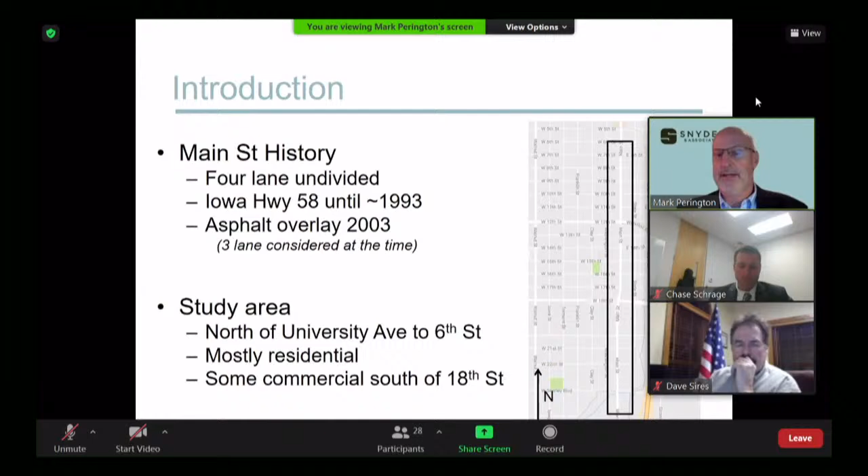This study, as we said, this presentation is an update to the study we did. We really worked on that back in 2016, in the summer and fall of '16 and the spring of '17, and then we brought it before council with a couple presentations in the summertime of '17, for those who don't recall. Essentially the area was a little bit south of Seerley, North University, south of Seerley, somewhere in there, on up all the way north to 6th Street, tying it in with what is really just finishing up here soon with the downtown streetscape updates. So that was most of our study area.

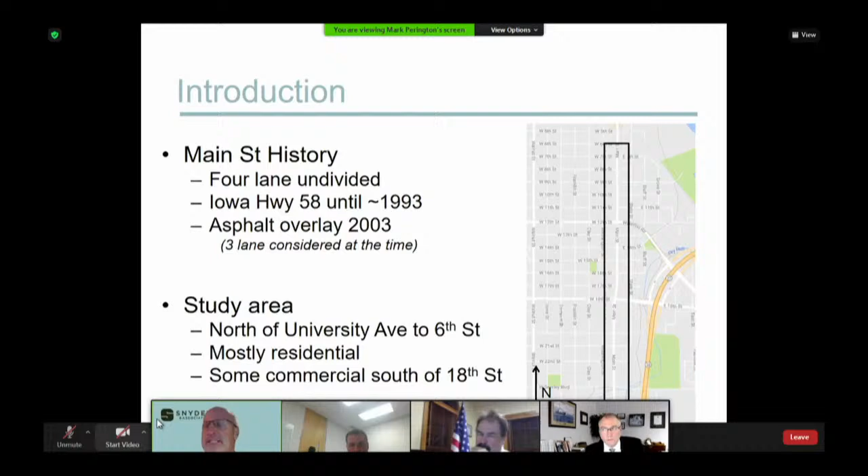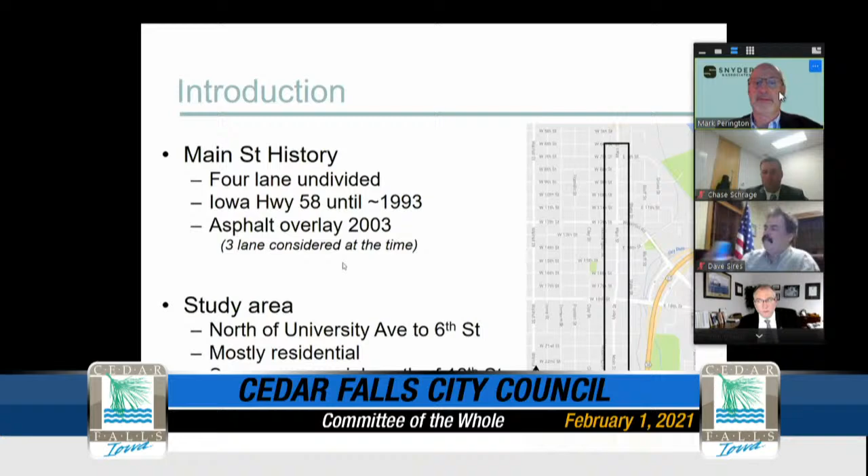The history of the corridor: it's been a 4-lane undivided road for quite some time now, and really up until 1993 it was Iowa DOT controlled when it was Highway 58. As for the last major maintenance work, there's been some patching done, but really an overlay was done in 2003. Back in that time, there were some discussions about, okay, when the major overlay work was going on, maybe are there some different ways to address the corridor with some safety and operational concerns.

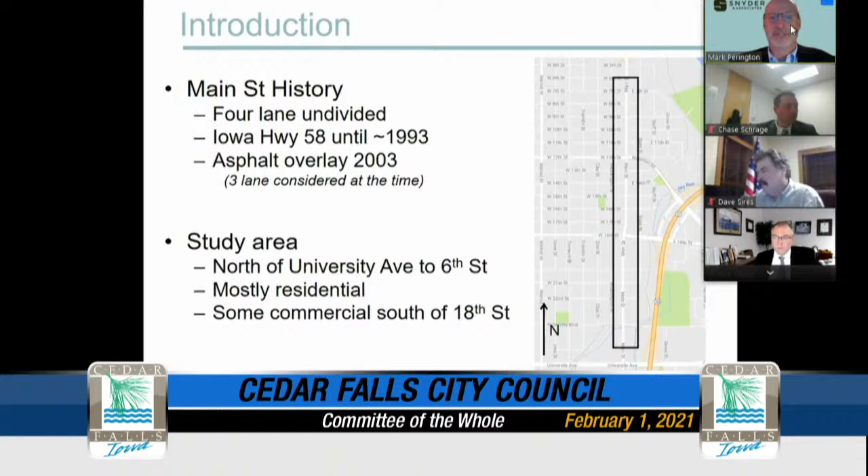So the primary reasons behind this study: we knew going into it that the corridor is in disrepair with the pavement - the asphalt's old, aging, and the problem is really the sub base, what's underneath it. It's just so old. You can keep putting a new top on it, but it deteriorates very quickly as we go through the freeze-thaw cycles of the winter. So it's getting to that point of diminishing return - you just can't keep putting little patches over it and get much life out of them.

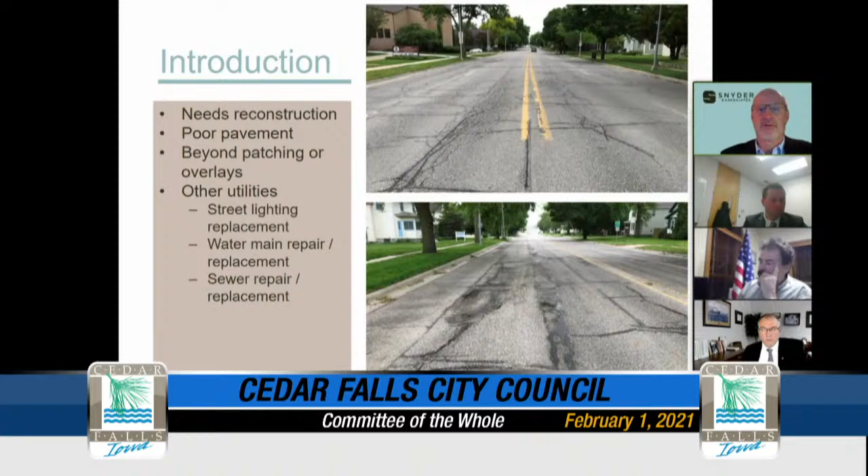Some other things going on in the corridor: the street lights need replacement. Again, they've been there for a long time. Some of the bases are getting rust and there are concerns with corrosion there. And there are some other issues with utilities underneath the corridor - the water main, I know at times there's some repairs needed there. Again, it's getting old, along with the various types of sewer, both storm sewer and sanitary sewer.

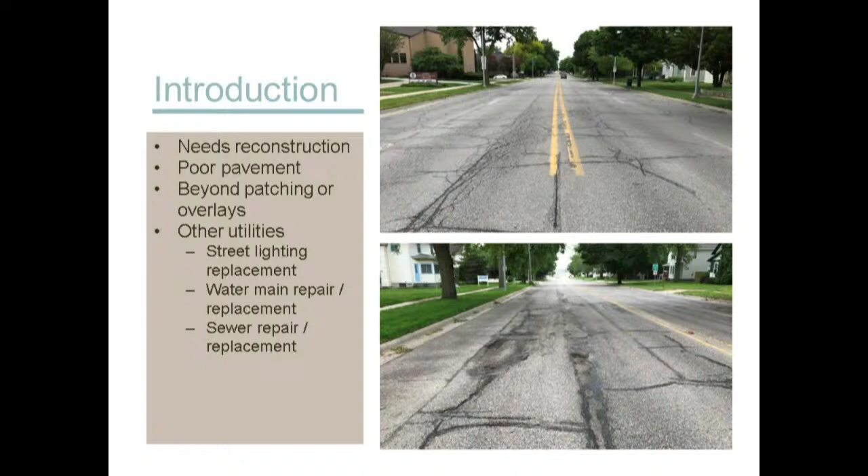So when we worked on the 2017 traffic study, because this total reconstruction was being discussed at the time, we felt, well, this is an opportunity. If you're going to go in there and remove all the pavement, the curbs, and old sidewalk, this is the perfect time to ask ourselves what do we want to do with the corridor, and how do we want it to behave for the next 25, 30, even 40 years. So there was an opportunity there to look at safety and operations and consider these types of alternatives.

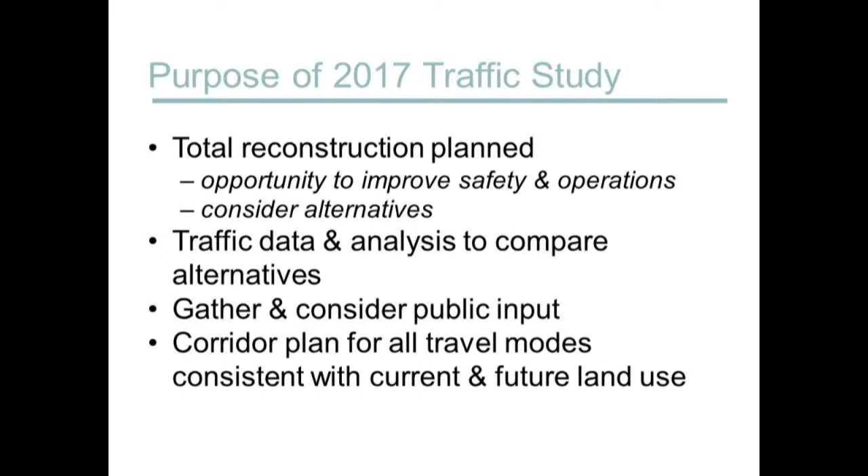We did the typical traffic study approach. We gathered fresh count information, safety information, all of these types of things. We had a couple of public input meetings, so we were able to share a lot of ideas with the neighbors in the area, the business owners, as well as the residential neighborhood. And it was nice - we got a lot of interaction and input from those folks.

And then we really just wanted to come up with a corridor plan. Our charge at the time we worked on this, and it's still the case, was that we wanted to consider all travel modes in the corridor and really try to look at the current land use as well as future land use.

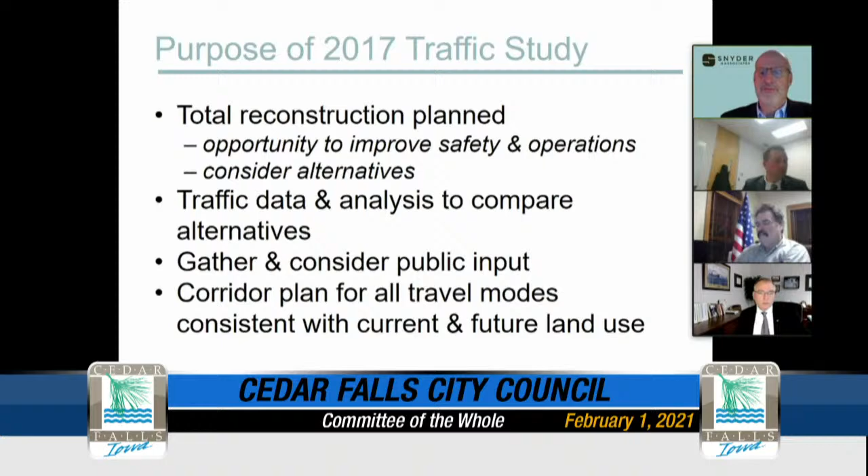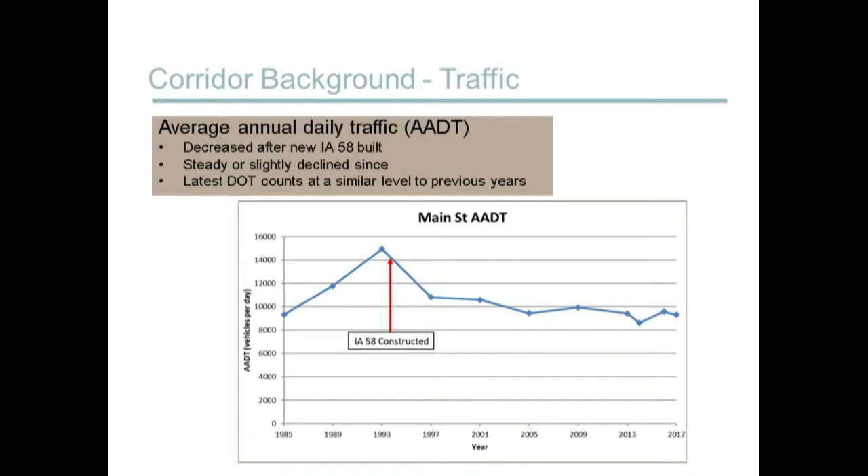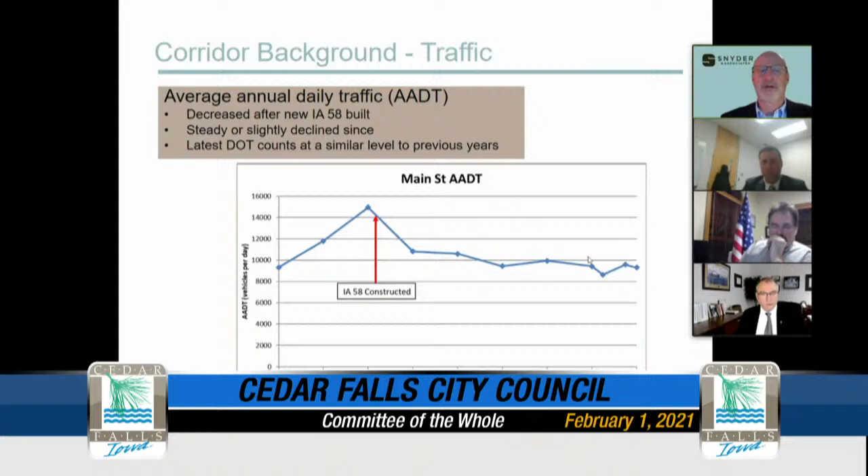That traffic diverted. And then really what we've seen is kind of a steady, these are just count increments. The DOT helps do traffic counts for all the communities. And so you have these count increments of about every 4 years, but we've seen really just a steady traffic in there, right around that 10,000 line or a little under. It varies a little bit in the corridor from one end to the other. It gets a 1,000 or so more, but generally speaking, we're in this 10,000 range as we look at the corridor. So we've really been on that plateau for well over 20 years now.

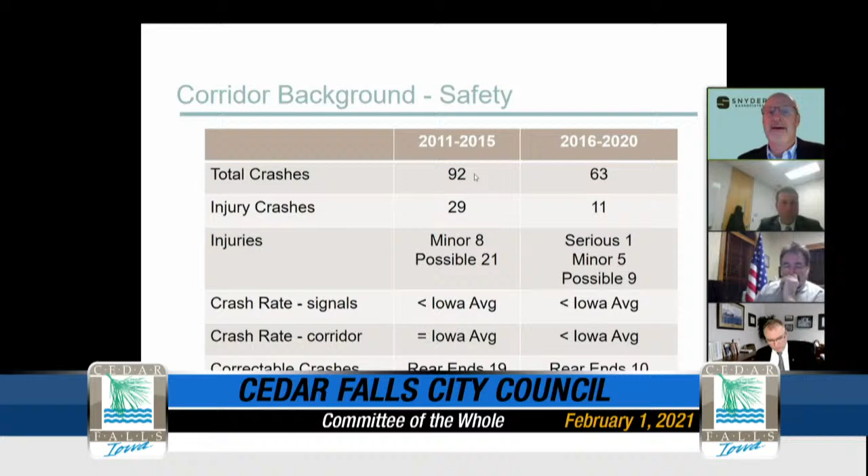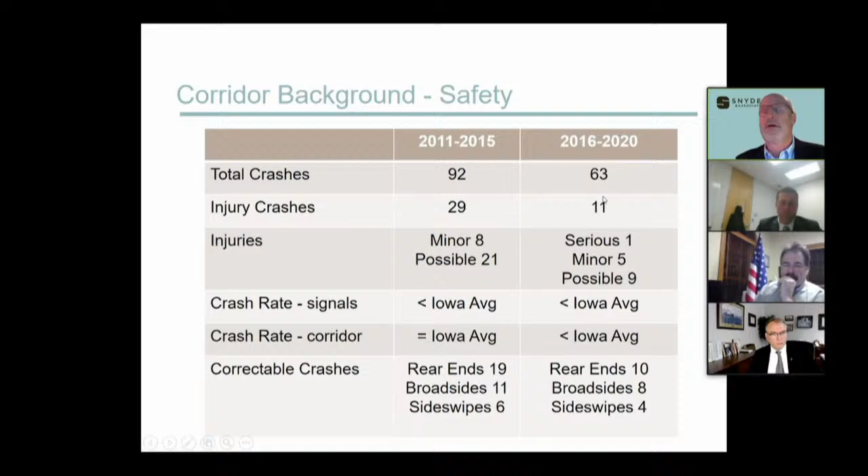Other key aspect of it is talking about safety in the corridor. Back when we did the study, you see this first column here, the data we looked at the time was a 5-year period, 2011 to 2015. You can see total crashes, what crashes do we have with injuries associated with them, and you can see comparables. We had the opportunity here with giving this a new look. A good thing to see is that crashes have gone down over the last 5 years as a whole. I don't have the year by year for you here, but that's a good thing. Still getting injuries in there, with the corridor one to the other.

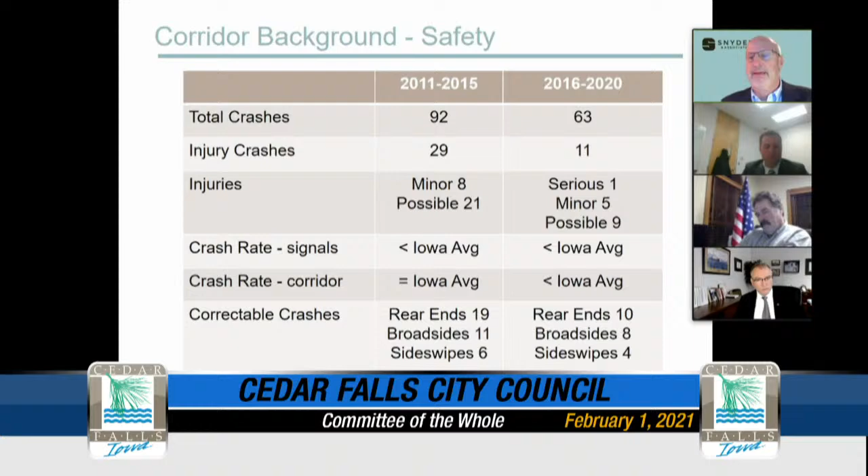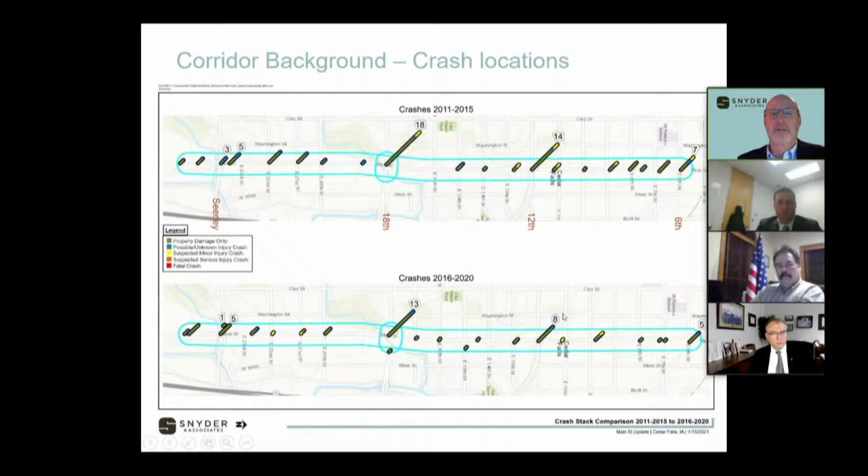That's Main Street. And one of the things that group identified was a desire and a recommendation to try on-street bike lanes, if the timing would work right for that possibility in the corridor, if it makes sense with a cross section to do that. So that was another key input into what we were doing at the time when we worked on this.

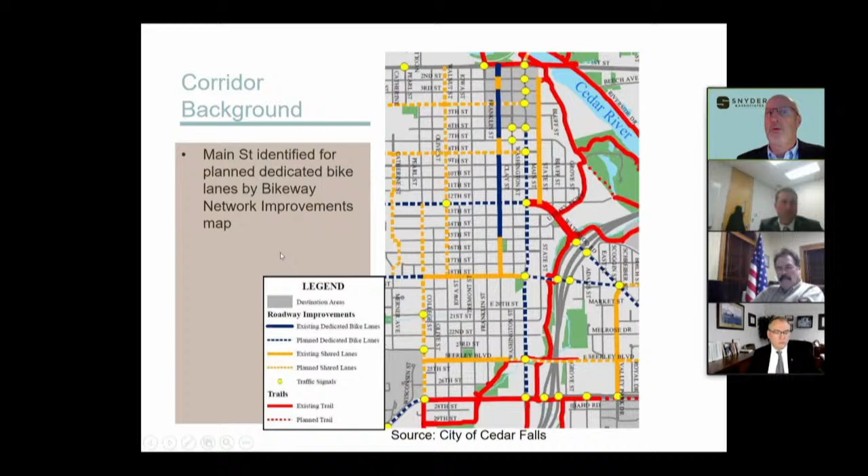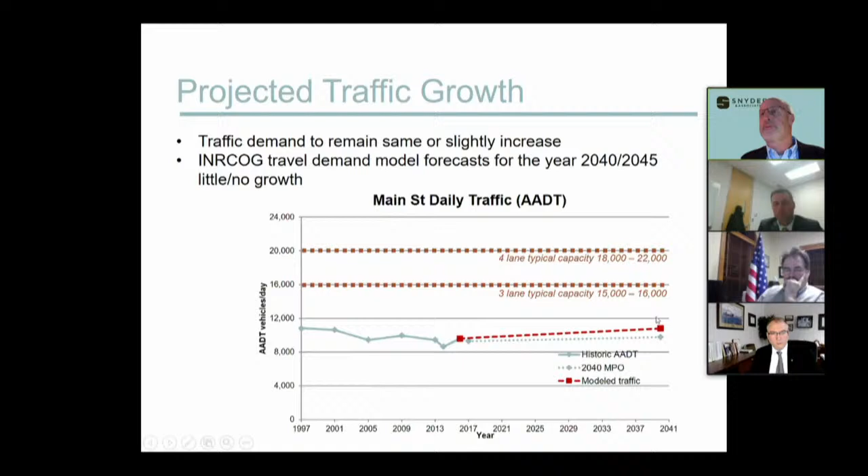So then what we did with the corridor is we talked about alternatives that we presented to the public and what kind of seemed like the obvious choices in the corridor, given, again, the existing land use, not a lot of change going on with those land uses. And really, we had three basic alternatives. There was kind of the 4-lane throughout, really no different than it is today. A second alternative was, what if we develop a 3-lane through the corridor, which again, one through lane in each direction with a center turn lane.

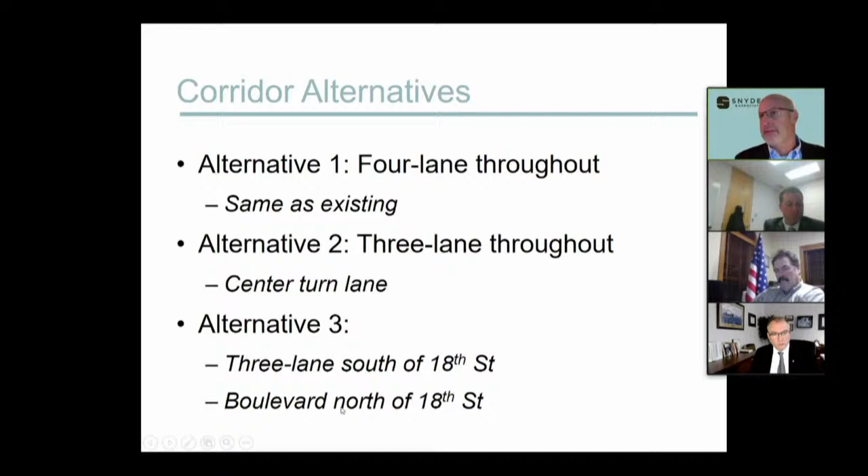And then a third alternative that came out of some discussion, and given the nature of the land use with the residential area, really the heaviest residential between 18th and 6th, was what if we had a 3-lane south of 18th where we have a little more commercial activity, but perhaps north of 18th, what if you had a boulevard in the middle, if we don't really need the travel lane? So graphically, now to help remind you, what does that look like?

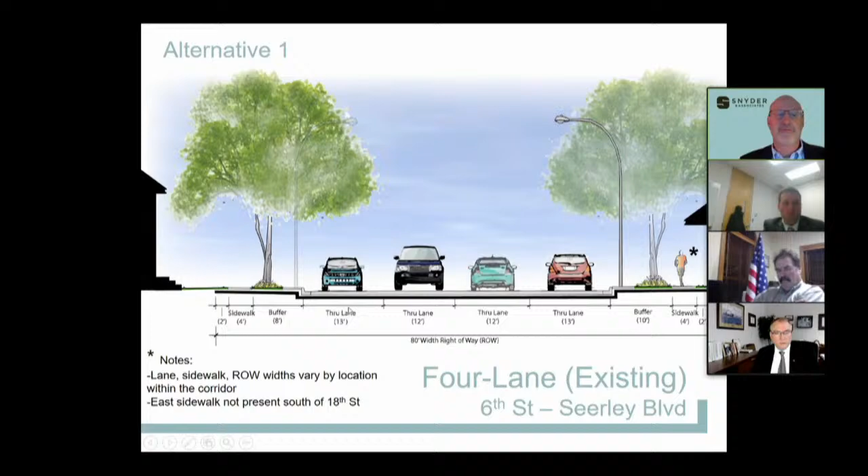There's essentially the 4-lane through the corridor, the 2 through lanes in each direction. And it isn't exactly the same all the way through, but generally speaking, there's about 80 feet of right-of-way through the corridor. It gets a little narrower, I believe it's at the south end. It actually gets a little narrower in a few places. But you have these through lanes, and then you have that little bit of buffer, and then you tend to have a 4-foot sidewalk on both sides of the corridor. So we just tried to represent that with an alternative to just put back the same thing.

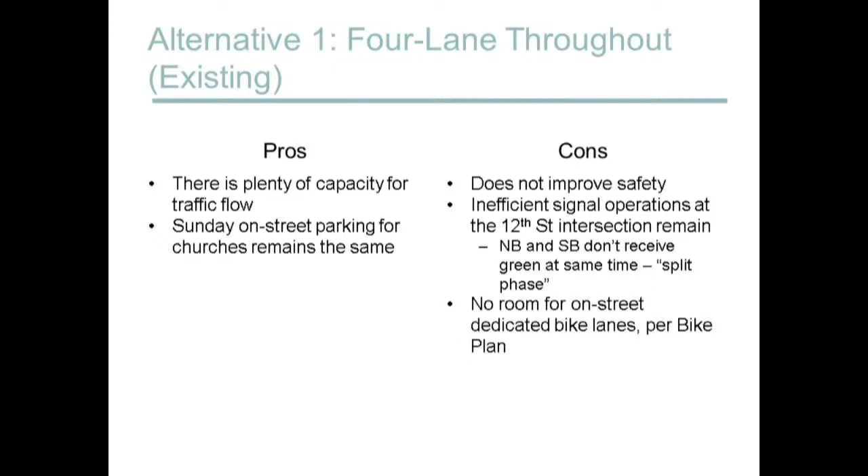Pros and cons for that. There's plenty of capacity for the traffic flow demand we have, in that chart I just showed you, that's more than ample. There is a small element, as we looked at in the corridor, up in that north end of the corridor, there's some on-street parking for churches that tends to occur on Sunday or other religious holidays. That demand is pretty small because there's just not a lot of parking stalls where you can put cars parallel parked on the street. Any given block, there was maybe 5 or 6 stalls, as I recall.

Some cons to that alternative, it doesn't really help our safety. That same 4-lane cross section has certain safety operational problems. And then there's been some concerns with signal operations and inefficiencies with the split phase signal at 12th. And then if you're wanting to look at the on-street dedicated bike lanes per the plan, you can't really incorporate that in.

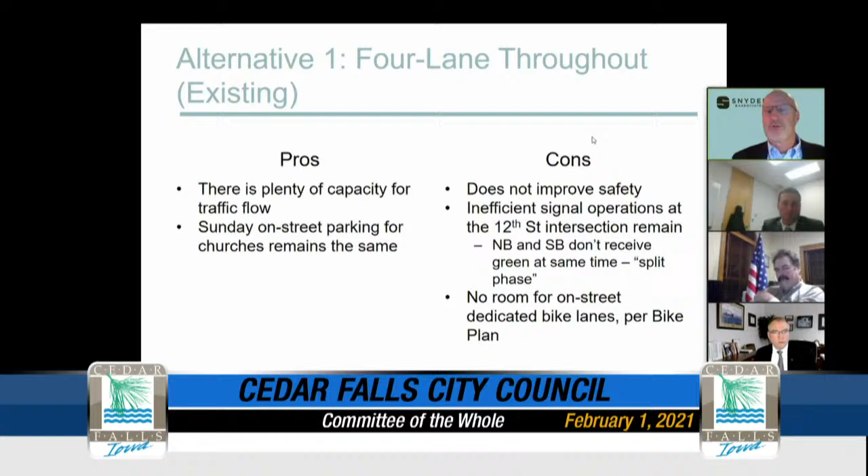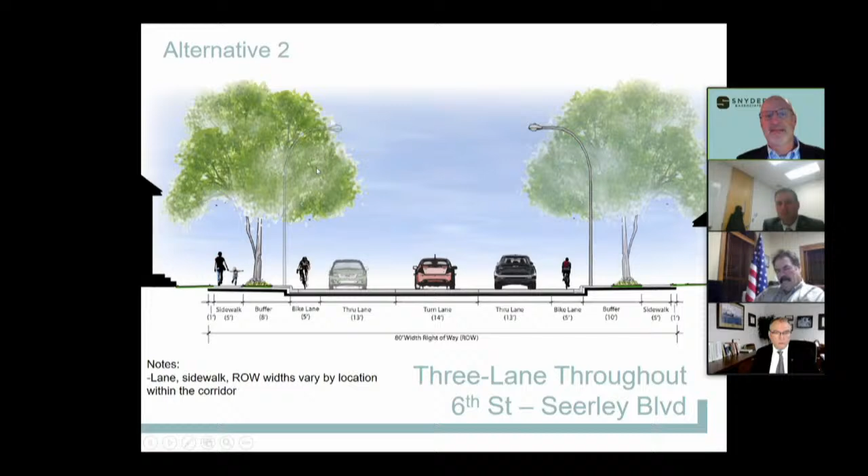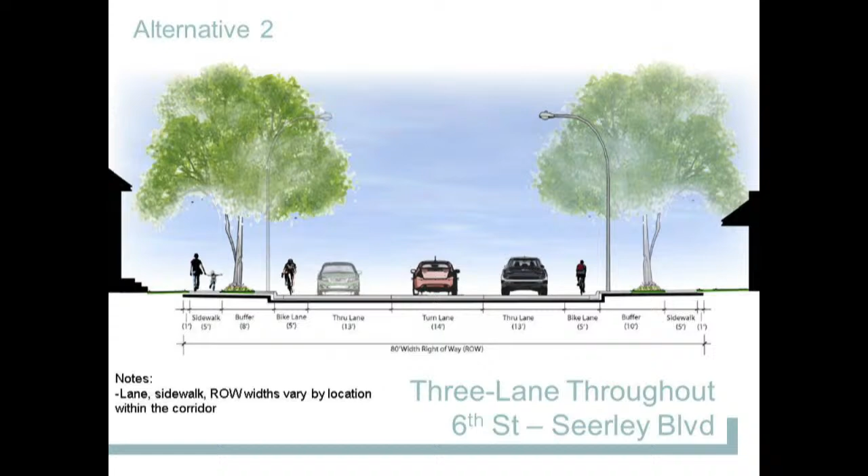And there's a lot of details to still look at with a design, but there's potential in here to even narrow this down a little bit more, a few feet. So there's some potential that that could tighten up a little more, which would save on some cost with construction having to be placed or concrete.

Pros with that, there's a lot more pros we get with the 3-lane. It's proven fact for a lot of years now. We get a lot more safety with that. We get rid of a lot of crashes that we have with the 4-lane. We get a much better speed consistency through the corridor. That was something that we did get some feedback from neighbors, that with that 4-lane, and because we're not very busy out there, people have the ability to pass people, go around and accelerate, and so you get a lot of speed variation.

We have more than ample capacity. Again, if you remember, I told you about 15 to 16,000 a day, and our demand now is in that 10,000 range. And even if we grow, we think it's only going to be maybe in the 12,000 range. So again, ample capacity to handle the traffic. We separate that left turning traffic and through traffic, which is a good thing. That's our safety benefit. We can make the 12th Street signal operate in a little better fashion.

And the other thing is, for any pedestrian crossings in there, we can actually help that pedestrian crossing. For pedestrians, it's easier to navigate when you're only dealing with the 2 through lanes. The center turn lane isn't per se a place for pedestrians to stand, but it does give them kind of a separated area out there as needed. And there's some enhanced treatments we could do. So that helps out, and it presents that opportunity for the bike lanes.

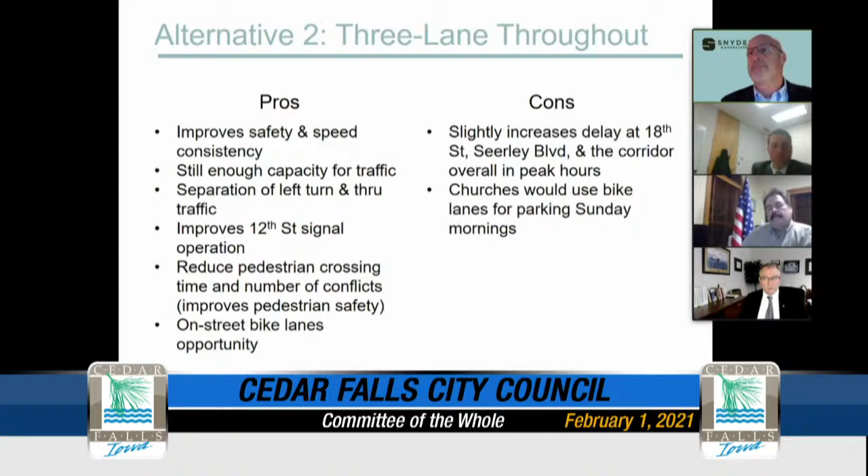Some cons, we get a little bit of delay in that you go to a single through lane, again, as you look at some of these other intersections. And then we have the comment I made about where we get a little bit of that parking. There'd either need to be the decision about no parking in there, or I have seen elements used where, because the conflict is typically so small and at such off times, you do still allow parking, vehicles can park kind of in that gutter bike lane area, and then through traffic can still get around them. Okay, so something to keep in mind.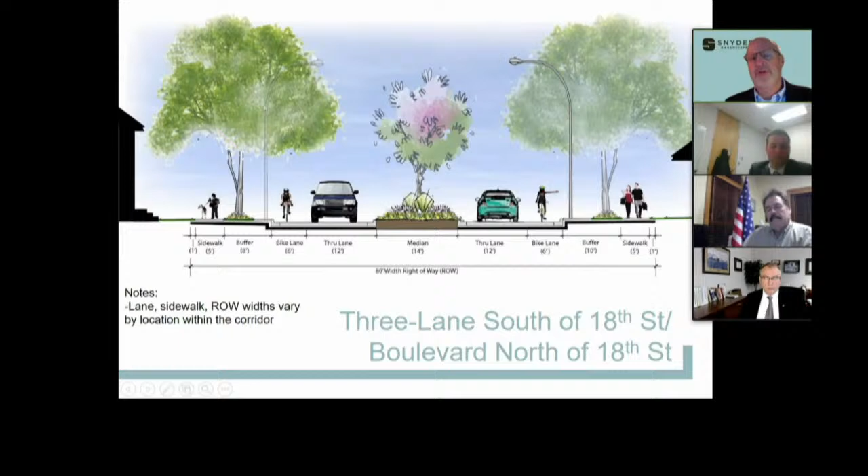That last alternative that we came up with was the idea, some people brought up, well, if we don't really need a lot of turn lane, is it possible to have a median in the middle where there could be perhaps some landscaping? And that just shows you that cross section with that same idea that you basically use the same space to put all the traffic lanes in and the boulevard idea. What I've highlighted for you, the darker items kind of at the bottom parts of the pro and con, is what's different.

The center turn lane, well, we don't have as much need as we get up in the residential area because there really aren't as many driveways. There's very few driveways. It's just block to block street intersections. And you have that ability, you have a middle island, you have the opportunity for an aesthetic improvement in the neighborhood, if you will.

Some of the cons: if you wouldn't do bike lanes, once you have that median in the middle, you still have to have the same wider area, because we need things like the ability for a car to pull over to let somebody out, or for emergency vehicles, you've still got to have greater width so a fire truck or police could pass a regular vehicle that pulls over to get out of their way.

There's some delay if we don't have the left turn lanes at the intersections as we go block to block through there, from a left turner not getting out of the way if you have that island.

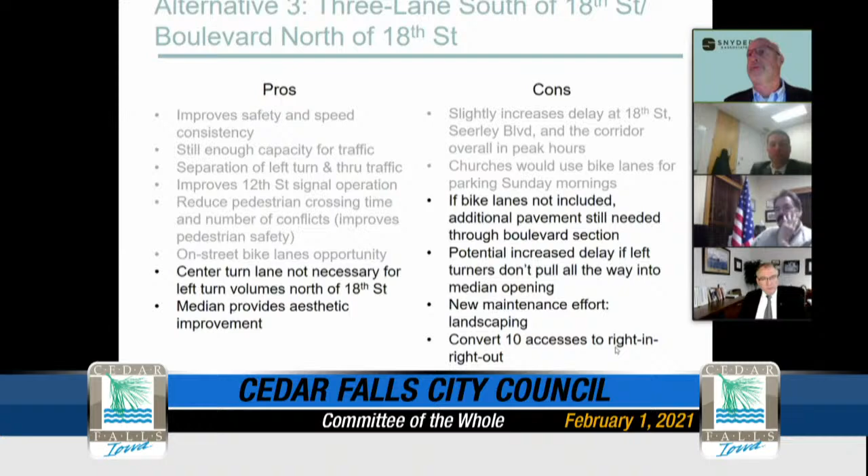It goes without saying the landscaping can be nice, but it creates a maintenance effort. And the other thing would be, if you put that boulevard out there, there are about 10 access points that then get blocked for a full movement. They become a right in, right out.

So in summary, it accommodates more modes when we talk about pedestrians and bicycle traffic. It increases safety in the corridor. It's a proven fact for 20 plus years, even longer now, with 4-lane to 3-lane conversions. It helps speed consistency, it has a way to meter itself, which really helps police enforcement. We can improve traffic flow at some of the intersections, and we get similar delays, if not better, with the rest of the corridor.

There'll always be opportunities for some aesthetic things, opportunities not to exactly continue the downtown look the same, but some other things you could do through there.

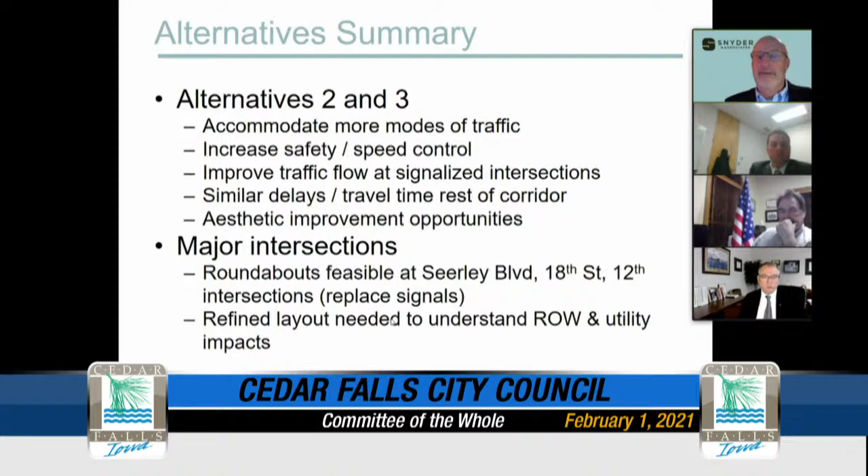For the major intersections, we believe there's roundabout feasibility at all the key ones, Seerley, 18th, and 12th, really to replace the signals. The key to some of that is a refined layout needed to really look at right-of-way and utility impacts.

Public input: we had a couple meetings, as we mentioned. We had a first meeting that talked about some of the existing information, and we talked to the neighborhood and got their mood and feeling on things. Then we had a secondary meeting when we came back and showed them the things we came up with.

I would comment, as we're going to talk about our recommendations and things like roundabouts, the timing of this was, as I remember, at that point in time roundabouts for the community, there was the one down off of Technology, I think. It was Technology down to the south, and that was the only roundabout in place at the time.

University was being discussed at this point in time, options looked at, and moving into construction. So the community wasn't quite as used to driving a roundabout and seeing how they behave, how they perform, what are the benefits of them.

So the 4-lane to 3-lane, to remind you again, we get a very definite proven overall crash reduction with these, anywhere from 20 to almost 50%. I mentioned the speeding, calming traffic, rear end and left turn crashes go down. We tend to help side street crashes because you're only negotiating one traffic lane in a direction if you're making a left turn exiting movement out of a driveway or a side street.

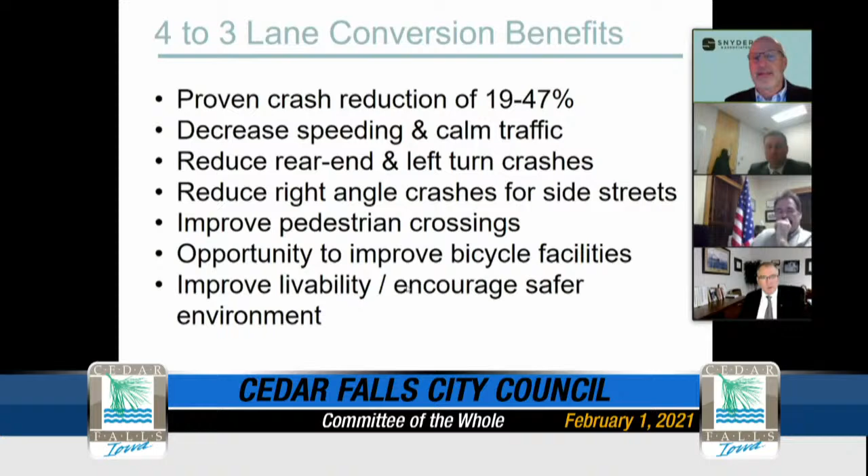It helps out with pedestrians, and there's an opportunity here for the bicycle facilities. So a lot of things that we think make this fit the nature of the corridor, both now and going forward.

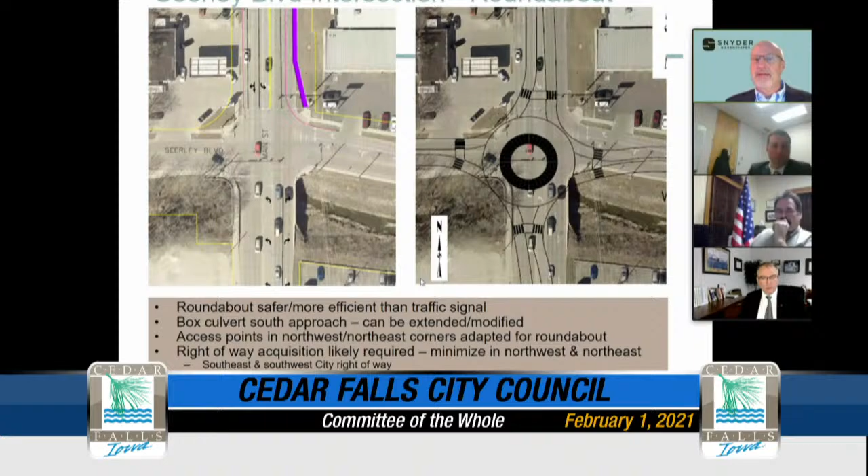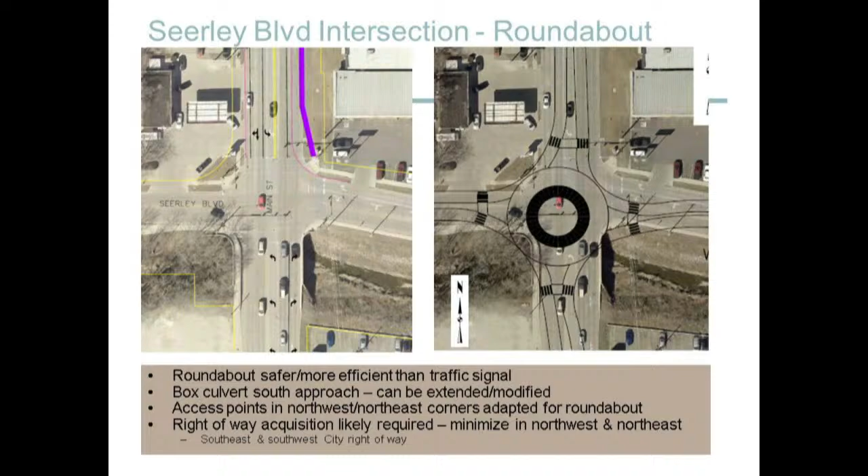So to focus in on a couple of the intersections, the 3 intersections where probably there's the biggest impact. Here's Seerley, and what we're showing you left to right, hope you can see that well, is the idea of what you see in purple and yellow lines up here, if you convert to the 3-lane, how that lays in there. You have a dual left and a single through lane, and you see it's kind of narrow, but you see the bike lane to the outside. This is some new sidewalk, that purple in the upper corner there.

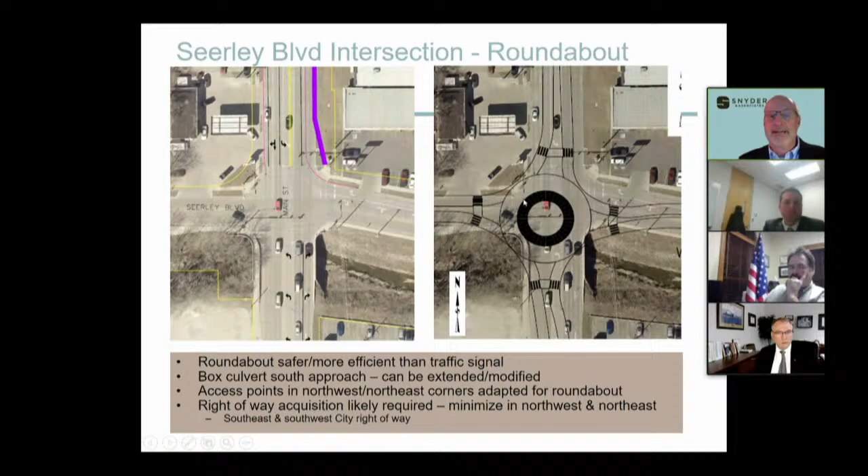And then what we're trying to show you too is an early concept roundabout, a single lane roundabout, how that would work in the intersection. It's much more efficient than the traffic signal, given, I think, at any given time we have about 10,000 vehicles a day going north-south, and probably 3,000 to 4,000 vehicles east-west.

The big thing is on the south side of the intersection, we have the box culvert that conveys the creek underneath.

So you can see there are some issues there, but Director Schrage got us information showing it's currently in pretty good structural shape, so it would just require some modifications to serve that area.

A point I'd make is that on the south side, you see these yellow lines here - this is really city right of way. So that widening down there doesn't require getting into private right of way, and we can still work on positioning this to mitigate any right of way impacts.

In these upper corners with the commercial development in the northwest and northeast. So then we look at 18th Street, showing a similar 3-lane corridor, more typical of what we do through the intersection if you were to keep it signalized. And then over here you see the roundabout layout.

Again, we're fortunate at this intersection in that the only corner that isn't city right of way is the southeast corner. Over here, I believe there's a pharmacy and some other businesses in this corner, so again we have some opportunity.

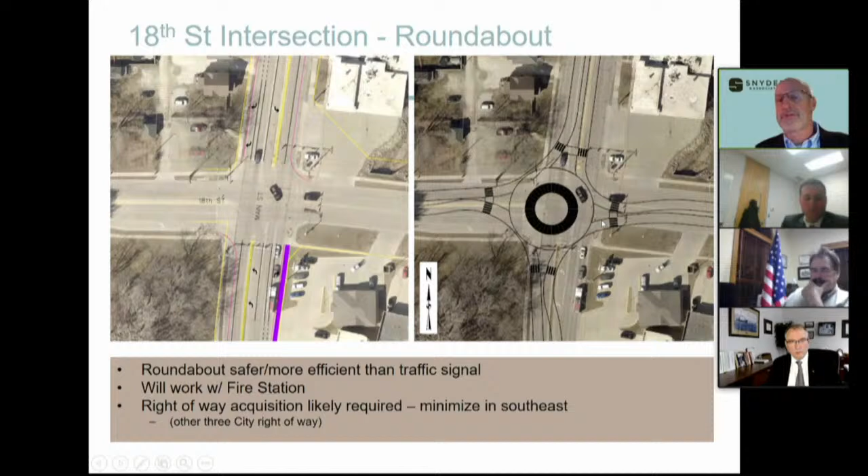You can see how when you start talking about the lanes of a roundabout, a single lane roundabout handling the traffic, what it can do is help soften up some of these areas since all the extra pavement isn't as needed. So again, some opportunity for treatment at the intersections to have that look a little nicer.

12th Street - again, things get a little tighter. Here you have the city fitness center over here in the corner, so you have the right of way there, but the other corners - I believe we have two properties that serve as rental uses, with apartments in these corners on the west side, and one more building over here in the northeast, I don't know on the latest check.

I believe it's single family residential. But you can see the roundabout does require a little bigger footprint, but it can help really serve this intersection in a much more efficient manner.

We wanted to just show you those footprints because we don't want to hide from the fact that the roundabout - as you've seen with many of them built now in your community - is very much a different thing in terms of the footprint you get, but there are a lot of benefits of safety and efficiency in the way they operate.

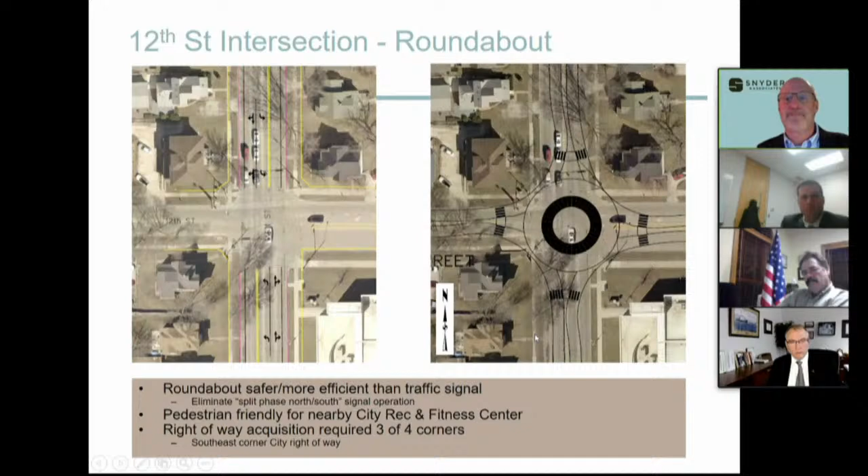So just to sum up a few things, the big thing we looked at was how do these things work over time. This is in minutes and seconds, but we looked at travel from one end to the other, and that's where I circled these main things. The improvements aren't huge - they come down to maybe about 30 seconds, 20 seconds throughout the various times of day, but it does work more efficiently as far as traveling through the corridor.

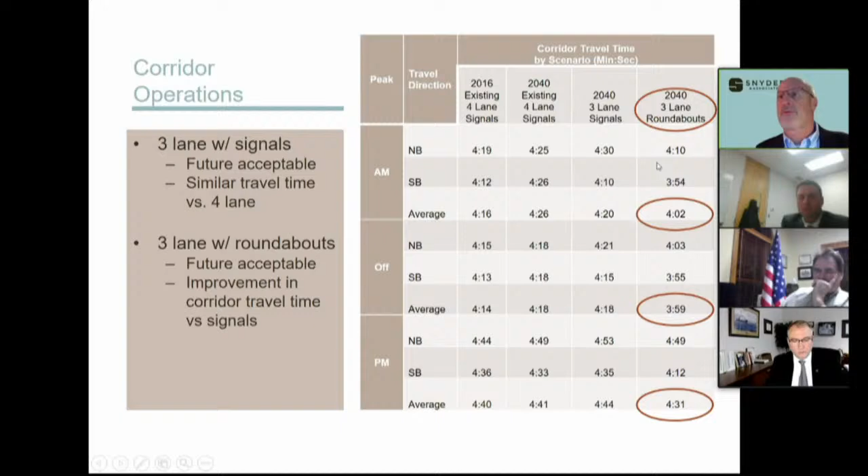The main reason we don't see a more robust improvement is really because the corridor isn't being stretched in its demand today. We're not overloaded with traffic or anything where we'd see a more dynamic change.

The other thing is, if anybody remembers me talking about Green Hill - when we looked at Green Hill we talked about comparing more of a life cycle cost, not just a construction cost up front, but over time, over the life of the project - 20, 25 years - how do these intersections cost out. What we do is look at the construction of it, but then how do we start saving in crashes, travel time, fuel, pollutant emissions from people idling at an intersection, and even the maintenance that goes into it.

These just focus on the 3 intersections and show you the comparison. The brownish orange color in the middle, the largest block in any of them, that's the travel time, which is most pertinent to users driving through the corridor, and that really adds up over time. So when I said it may only be a 20-second, 30-second improvement, the thing is over time with everybody going through there - 10,000 vehicles a day - it adds up.

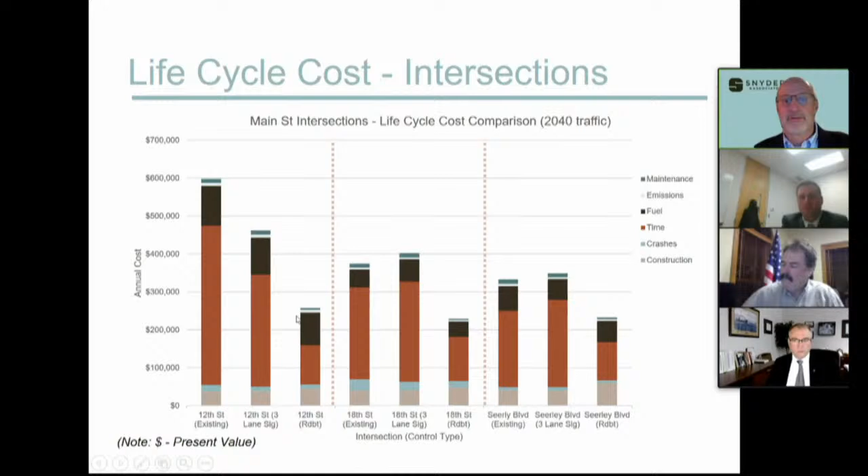You can see that what really shows here is that the third item over in each one—12th Street intersection, 18th intersection, Seerley intersection—is that the roundabout in the 3-lane serves the best, performs the best when we look at it as an annual cost. And then if you lump together the whole corridor from Seerley all the way to 6th with that alternative, 3-lane with roundabouts, it doesn't look like a big dynamic change in the bars here. You can see it's a small difference between existing 4-lane with signals versus 3-lane with signals. But the 3-lane with roundabout really equates to about $500,000 a year in annual user cost.

So over the life of the project, we're talking anywhere from 10 to 11 million approximated over that 20-year life, and the project itself is somewhere around 8-9 million in total cost. So it's almost like you're recouping the savings with this alternative of 3-lane with roundabouts, even though we don't always think of projects that way.

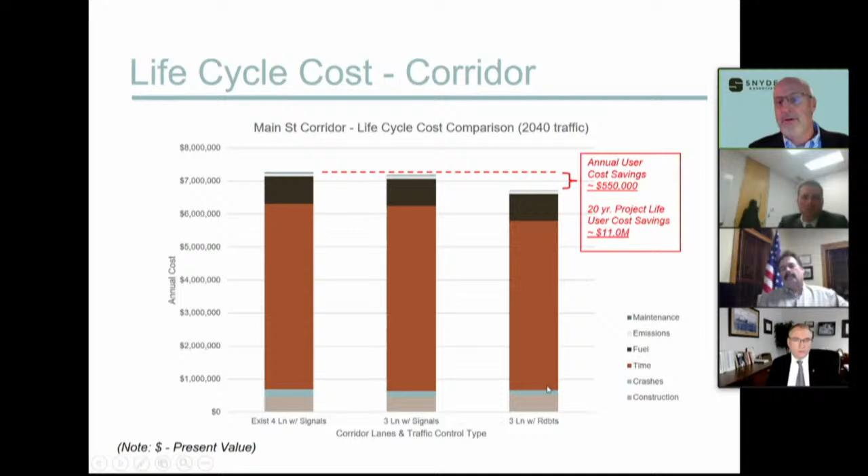On funding opportunity, we think this corridor is a good one. The DOT did an overall statewide review of 4-lane to 3-lane corridors, and this one was identified, even though it's not a state route—they looked at corridors generally. It was identified as a candidate for a 4-lane to 3-lane conversion. I've been involved in these things for 25 years at least, and it's a perfect candidate in my mind. The Traffic Safety Improvement Program, a funding program through the DOT, scores roundabouts and 4-lane to 3-lane conversions very well, and that can be upwards of—there's potential with an application of up to 500,000.

The main thing that might be an opportunity is whether they'd allow us to split the corridor into some pieces, because that's the talk of how to get it constructed. We're not sure if they might just look at it as one big project, so they might limit us to one application. But again, we think there's a good opportunity for additional funding to be brought to the project with this type of alternative.

Schedule: Chase asked me to add this in, just to give you a time frame. Design and right of way getting going this fiscal year coming up, July 21, and then construction per the CIP—the idea is fiscal year 23 through fiscal year 25. Within that, the community has been successful in securing STBG federal funding from your INRCOG group. There's about 2.9 million already allocated and set aside to the project.

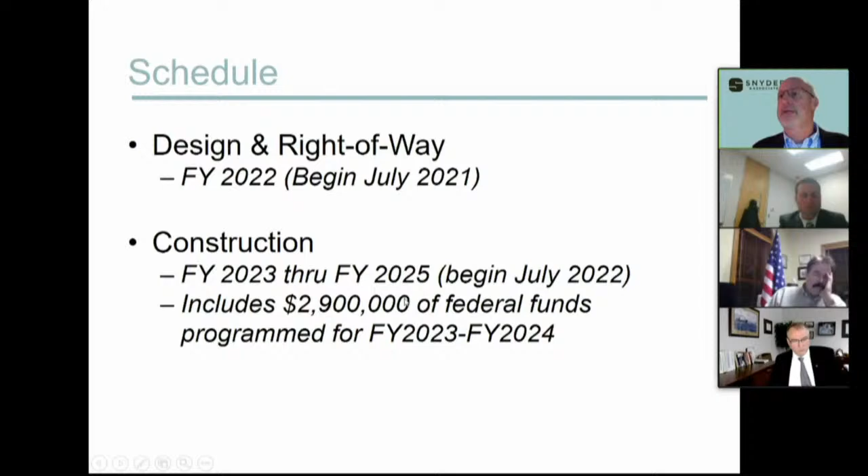Bottom line, our recommendation to finish this up for you: a 3-lane corridor. This gives us enhanced safety over the 4-lane, which we think above all else is the most important thing to consider. It reduces all those conflict points, speed, consistency. We think it really creates a corridor that is consistent with what the overall neighborhood is, whether it be the residential area from 18th North, or the mixed residential and commercial at the south end of the corridor. The on-street bike lanes are consistent with the plan previously recommended, 6th to Seerley with a tie-in at University, and then roundabouts at all 3 of the signalized intersections.

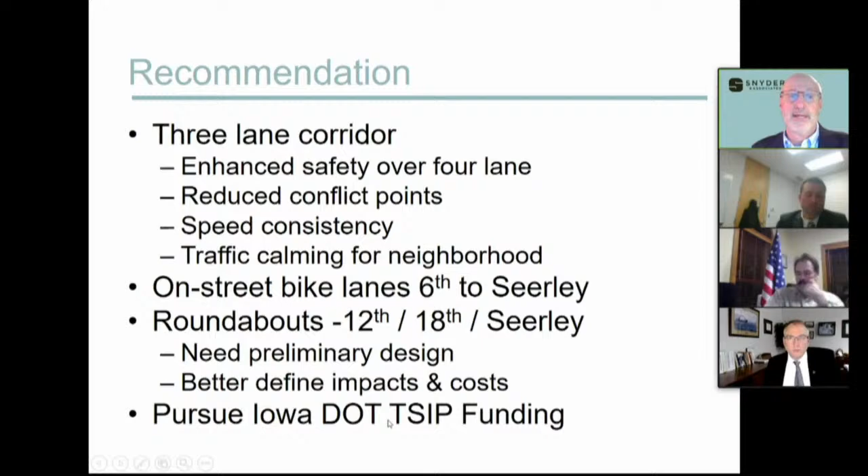And then the last recommendation is that we definitely pursue that DOT traffic safety funding to leverage more dollars into the project for the community. So, a lot said there—I can go back to any slides. We have some other slides that came up from questions before. I'd be open now to really just try to answer any questions for you folks. Wade and I can try to do those, along with Chase and so on. So, thank you.

I'll open it up for council discussion then. So who'd like to start us off? Mayor, if I can. Yes, Councilmember Miller, go ahead. This is for Chase, I think, more so, or maybe David Wicke—but when we first started looking at this, why did we not look at 6th Street as well as part of the corridor? Was there a reason for that, or did we just need to specify something different?

I'm not sure, Stephanie may have some insight as she kind of led the study at the time, but the limits that were established, I believe... Mark, did you guys collect data at 6th? We have some information at 6th.

It's a good question. We looked at it, and at the time as we were looking at the 3-lane, it ties in quite well with the street cross section coming down from the north out of the downtown streetscape. So it really got less focus than the other intersections. The demands are much lower on traffic, and there's a very tight right of way in the southwest corner with the Casey's there. But there could be some opportunities to look at if so wished. I know not quite as many crashes, and some other things didn't resonate as much to require additional look.

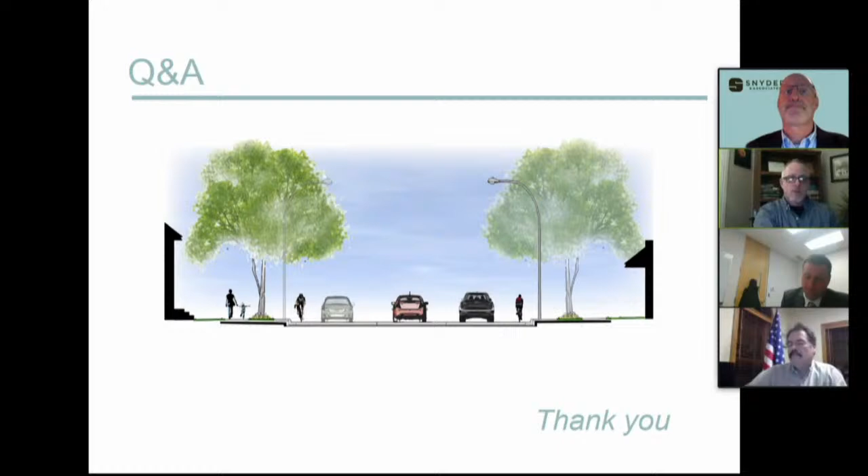Thank you. Other questions, comments? Mr. Mayor, Councilman Kruse, go ahead.

I like the roundabouts, I really enjoy them I guess you'd say. I can see they reduce accidents and that sort of thing. The thing I'm concerned with, if we went to page 10 with the bike network highlights, if we can do that.

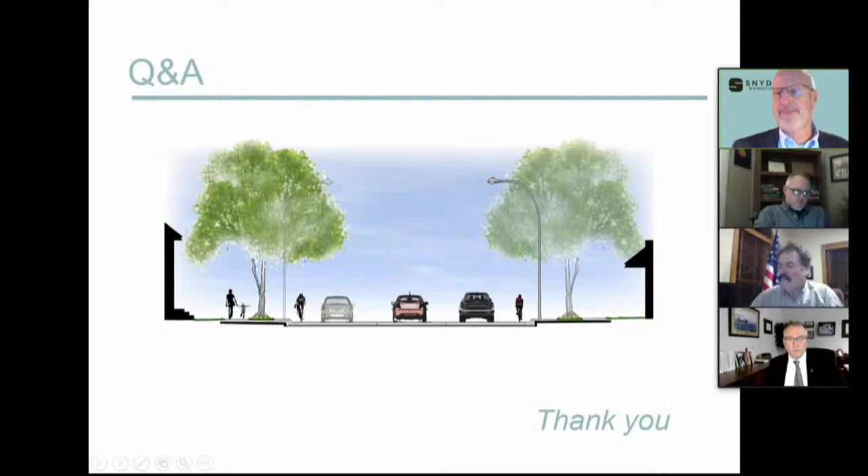Yeah, I'll bring that back up. Let's see. Yeah, bear with me. Come on, there it is.

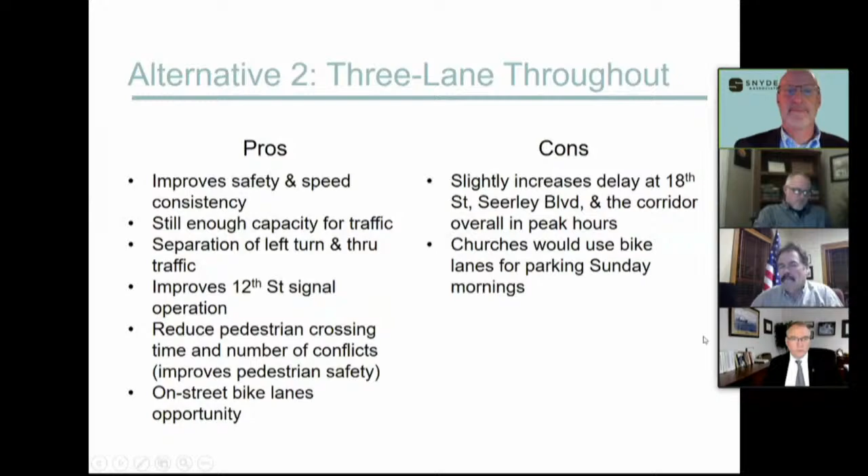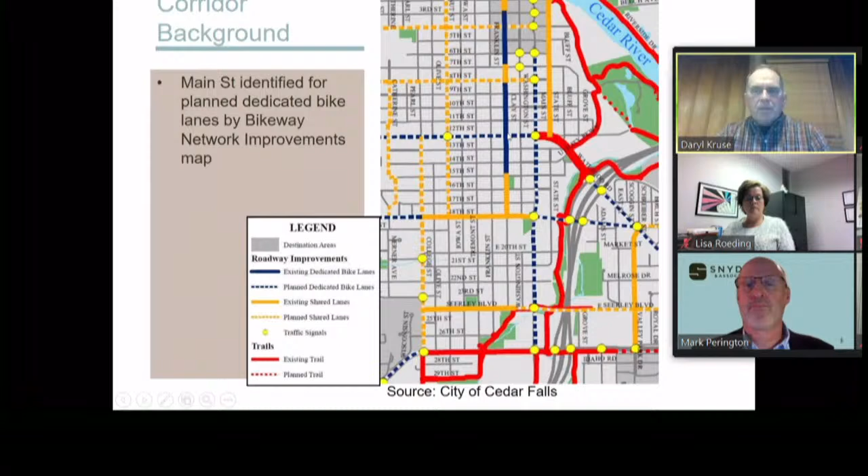Okay, if we look at this closely, we have the red as established trails along the creek and some railroad tracks possibly, but a very picturesque area for families and people to bicycle and enjoy the weekend and that sort of thing. You've got Clay Street that's got two dedicated bike lanes existing, State Street has a shared lane, and then we're redoing Washington Street as well coming up here.

I find it, I don't know, concerning that we are going to put a lot of effort into taking away traffic lanes to put in a bike lane when we already have two, three, four bike lanes already in about six blocks, and we're adding two more. And I just wonder, because I look at the alternatives.

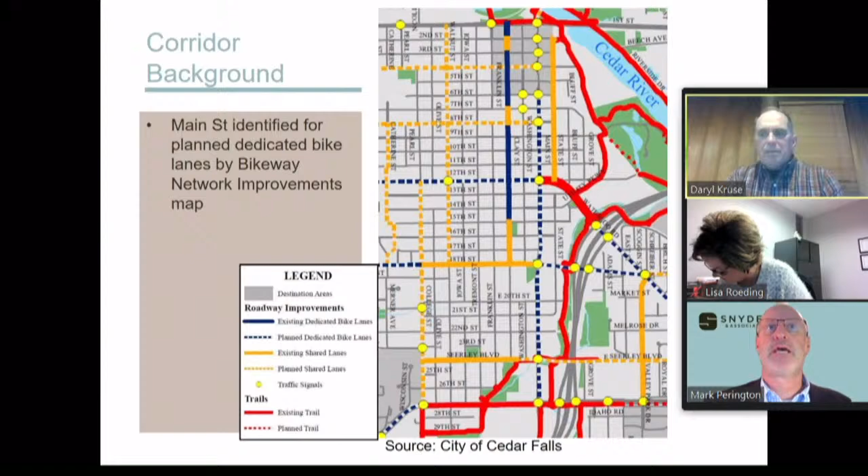Have we looked at putting roundabouts in on the 4-lane so that we spread out traffic, smooth it, and then implement that option? I think that would be, in my mind, the best fit, because I've had people come to me and say things like, they have elderly parents and they drive slow, and they're going to increase the congestion on a 1-lane road when there's not an opportunity to pass. And they say that the traffic will go as fast as the slowest person moving. And then you're implementing boulevards in that turning lane that takes away the opportunity for left-hand turns.

I counted 33 different opportunities for driveways and businesses from, I think it was Seerley down to 6th. You're mentioning 10, but I know there's dramatically more than 10.

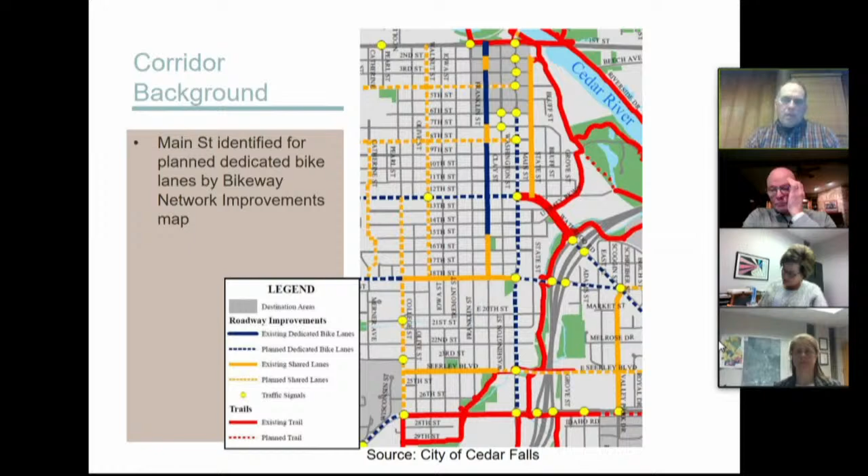So I look at the bike situation. I've done a lot of biking across the United States, a couple times on RAGBRAI. And have we incorporated any bike accidents into the study and the statistics? I know, for example, I was in Denver, Colorado, and they do a lot of the bike lanes, road diets. And oftentimes you have a vehicle making a right-hand turn with a bike lane right next to them, and they pretty much ignore the biker coming down. And a bike accident with a vehicle can be a fatality pretty quickly.

So we may be improving the statistics for crashes on the corridor, but we've got to incorporate problems with the bike accidents. And I've seen, and I have to say I've done it myself, I'll be texting while I'm bicycling. I've seen a lot of people do that, it's very common. They feel like, I'm going really slow, I can answer my phone and talk on my phone and that sort of thing. So we've got a situation where we've got to protect the bike lane from the traffic, but we have Clay Street and State Street, and we can put a bike lane on Washington, I think safer than what you're describing here. I just have a big concern with that.

And then I guess one other component is the response time for emergency vehicles going down through here. If we got a boulevard, a big part of that is there's not opportunity for an emergency vehicle to get around a person, or a person to get out of the way.

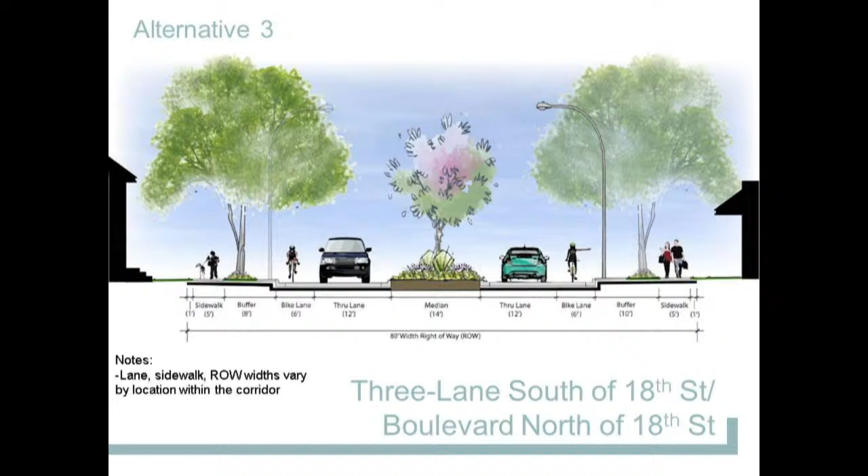Like I said when I started speaking, I like the roundabouts, but I like keeping a 4-lane and putting the bike lanes on the side streets. I myself prefer to bike, with less cars whisking past my shoulder. We've got nice green space bike trails to utilize for commuters, for recreational bikers, and then the people that want to race, since all the streets are legal anyway to go racing down with a bicycle. So those are some of my thoughts off the top of my head here.

So I guess I'm curious, particularly about the bike lanes, why we have to put them in there.

I can try to address some of those points if you'd like me to start. Yes, sure, please, Mr. Barrington. Okay, as far as the...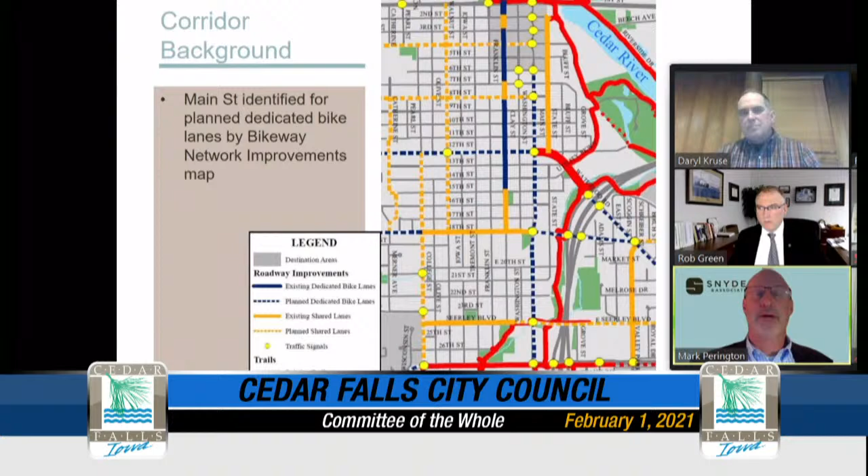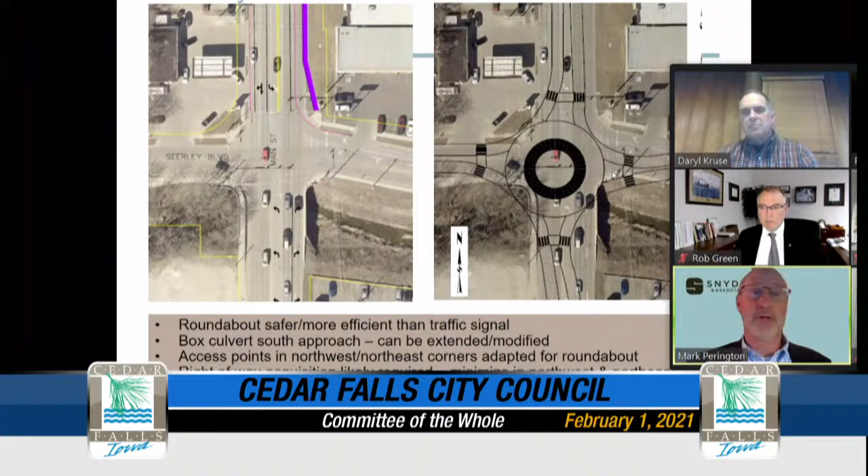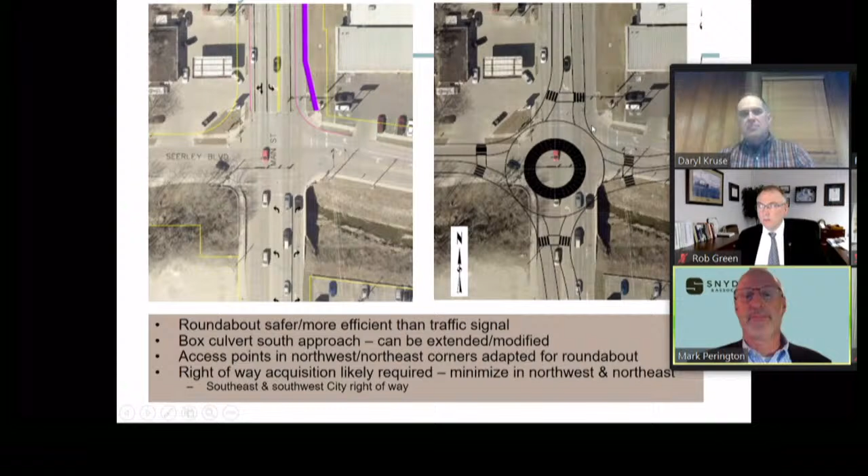4-lane with the roundabouts, as I mentioned, we don't... if I can, let me just go to one of those. Yeah, there we go. Here's down at Seerley as an example. With the 4-lane, if we bring the 4-lane in, we certainly could, but our capacity, the efficiency of a roundabout, we don't need multi-lane roundabouts. We don't need a roundabout with 2 lanes all the way around it at an intersection. And so I think the key is, and that would require even a bigger footprint than the circle you see here. So I think that would be one aspect, that if you maintain the 4-lane and wanted to continue that consistency through the roundabout, you would have an even bigger footprint at each of those intersections with the roundabout.

The other thing is, certainly single-lane roundabouts, what we have found is they perform well if the demand is appropriate, the level of demand needed to get through it. What you don't have versus dual-lane roundabouts is some of the people going through and trying to go together, maybe a little bit of side-swiping, things of that nature. So given the traffic demands at these intersections, single lane roundabouts are all that we need, if you will.

Also, related to the 4-lane, in discussing the boulevard, I want to clarify a couple things with that. We only considered the boulevard from 18th Street north to 6th. It was kind of a hybrid option. I may not have made that clear.

From Searly up to 18th, there's a lot more commercial driveways throughout the corridor, so there we had a 2-way left turn lane, center turn lane with single lanes, no matter what. No boulevard through there. Could I ask a quick question on this schematic here?

Where do you put the bike lanes? I see the crosswalks, but I don't see the bike lanes shown there. Right, with bike lanes, usually with the roundabout, they come along the side of the roundabout, they feed into it where they normally are. And then usually there's a ramp-type access where you take the bicyclist up and adjacent to, and look for a similar crossing, is the way you do those. You still kind of separate them a little bit at the intersection in how they behave and go through the intersection. So that's how that would work with the roundabout.

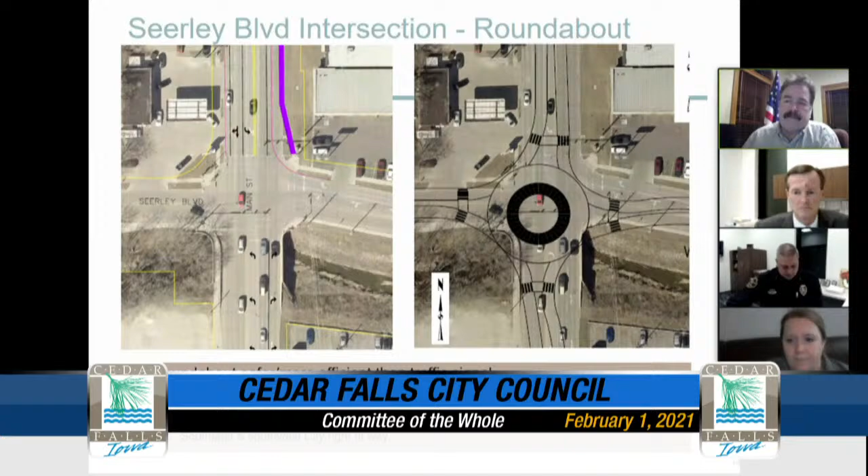Is that something that can be estimated prior to a design accurately? I think Wade might have some of that information. I do. I was going to ask you if you wanted me to speak, Chase. Thank you. We actually took a pretty decent look from a conceptual standpoint at anticipated costs, and there's a lot of unknowns as it relates to utility relocations, utility replacements like the sanitary sewer, for example. But with the incorporation of roundabouts at Seerley, 18th and 12th, and the expansion with the box culvert, you're correct, Councilman Sires, that there is a little bit more cost associated with the project as we would anticipate at this point.

Currently in your CIP, you have 8.3 million, and we're estimating with the inclusion of the roundabouts as well as the replacement of the sewer, replacement of the water main and updating the street lighting through the corridor, we're talking a little bit under $10 million for the entire corridor. And that's for about 1.2 miles of roadway reconstruction, the sidewalk, the bike lanes, the roundabouts, and storm sewer upgrades.

And Mr. Griman, when you gave the figure for 8.3 million, that first figure, did that also include sewer and other infrastructure improvements? I'm not sure if it did or not. We pulled that right out of the CIP. Okay. Well, it's good. So we have some figures available. It sounds like we'd want to have that available in a slide or in writing that we could take a look at if council desires that.

So, Councilmember Harding, I saw you had your hand up. Yep. All right. Well, I'll try to go quick since we're running short on time. About 10 minutes. Yeah, I'm gonna list my questions out. It's a tough decision, and I'd really like to get a lot more information. So here we go.

Is it possible to do a 4-lane with the single lane roundabouts? Funnel in the double lanes to do single lane roundabouts. That would be one question. Secondly, safety is definitely paramount. I don't want anyone getting hurt.

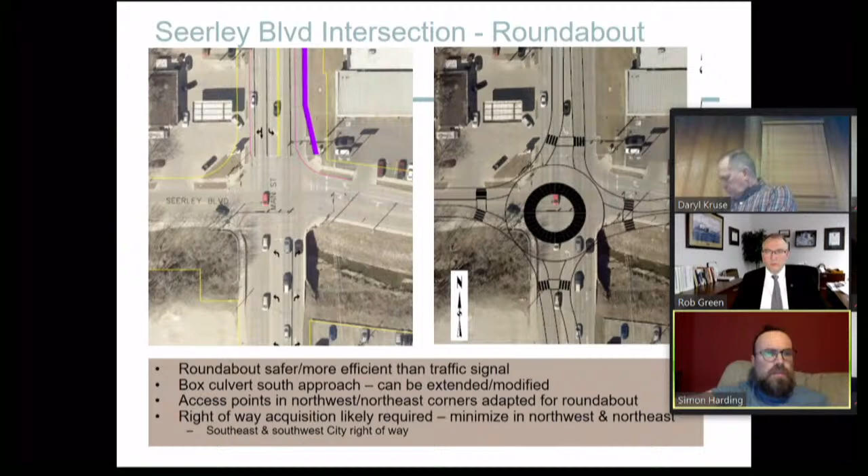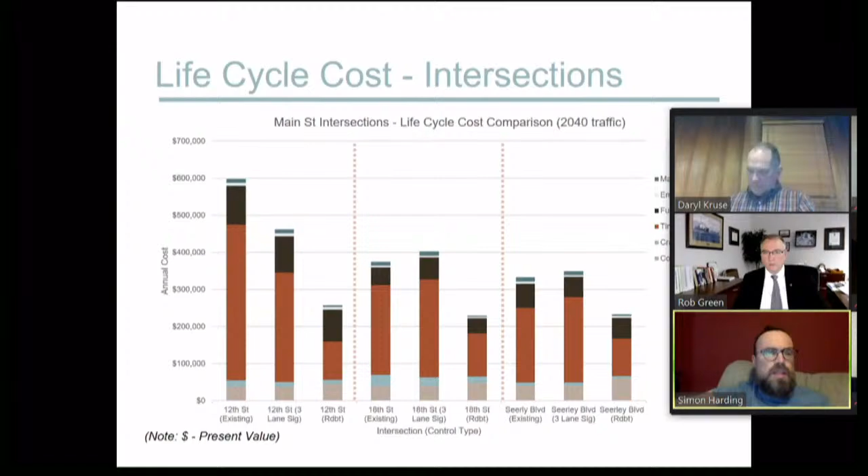Page 20 of the presentation, which thank you for the presentation, by the way. I love getting all this information. Page 20 says there was public input on 9/13/2016 and 5/23/2017. I'm very glad that we're reaching out to the public. Is there a way that I could access and see the notes and the feedback from the public and the ideas that the public brought forward?

What did the stakeholders in the area have to say about this proposal? The churches, the houses directly impacted, what do they think about the project and how will it affect them? Is there anyone who's going to be more affected than other people by us redoing it 3-lane compared to 4-lane? I think the presentation with 3 lanes and a roundabout looks great. The time's lower, all this stuff, but I really would prefer a lot more information like I just listed before I feel comfortable making a large decision like this.

Thank you, Councilor Harding. Councilor deBuhr, you had a hand up? Well, yeah, if we have time.

In the corridor background, it talked about correctable crashes with the rear ends being 10, broadside 8, and side swipes 4. I wanted him to explain what is a correctable crash. I'm curious on that because when you talked about University Avenue, they talked about the roundabouts causing more rear end accidents. And if our current problem is rear end accidents, would we be creating more rear end accidents?

Okay, correctable crashes. The way we usually look at them is, let me give a real simple one, a left turn crash at one of the intersections because we don't have the left turn lane. I can't see around another vehicle opposite from me because we have a 4-lane versus left turn lanes that align and I can see better around them. That's what we'd call a correctable crash. The aligned left turn lane gives you the ability to now see better, make a better choice, get around.

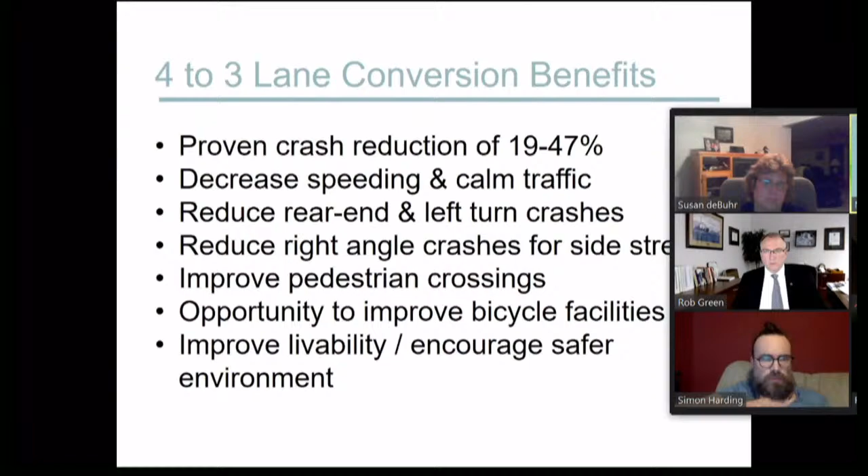What we also see with the 4-lane to 3-lane is rear enders go down because, again, we don't have left turning traffic that typically comes to a full stop in what might be a through lane that you're expecting to drive through faster. So that's a correctable crash. We see side swipes change with 4-lane to 3-lane because people are going through there and they're maybe maneuvering between lanes. Here's a left turner, I'm going to move over, and they move back and so on. And that tends to create side swipes. We see those go down.

Roundabouts, the biggest benefit that we see, and this will hopefully help Councilman Harding too, is that at intersections, versus a signal, we help to take the right angle crash way down. Those are where we get our most serious injuries. Somebody blows through a red light, not paying attention, and we get that severe right angle crash. The roundabout would help to deter that, in that people are slower. So if they do hit, it's plastic and material that's damaged, not people. So those are the correctable ones that we see.

Rear enders tend to come in when we also have a capacity problem where demand is much higher than our ability to serve it with whatever we have out there, whether it be 2 lanes, 3 lanes, 4 lanes, a traffic signal, stop sign. And so with rear enders, you may see those with roundabouts in that people proceed into it.

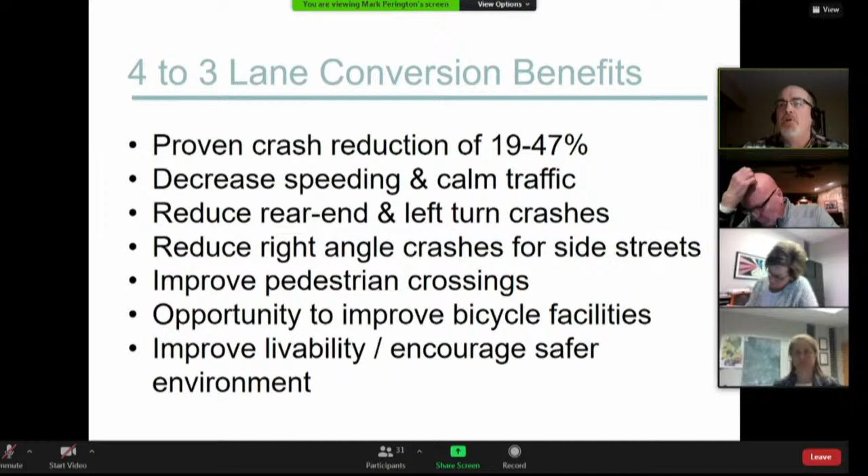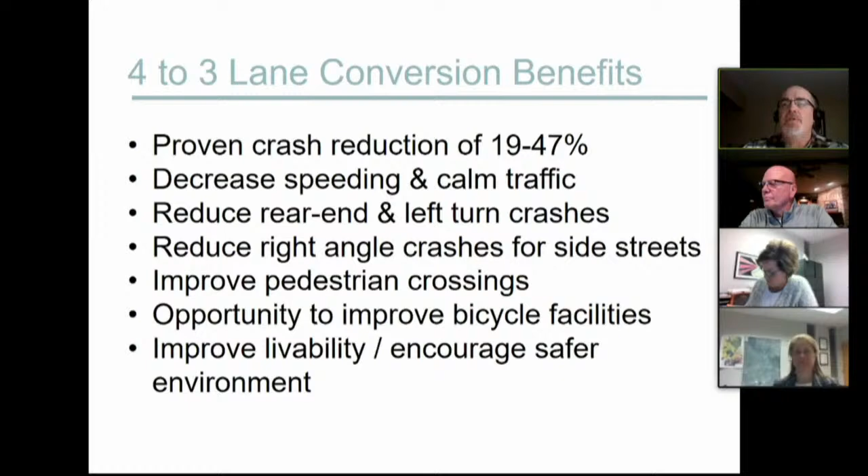I sure can. Thank you. We didn't compare directly the cost of the roundabouts against what it would be for a 3-lane intersection with upgraded traffic signals per se, but that is definitely something that we can put together as a cost comparison for the city. Just to echo what Mark had mentioned about the twin box culvert on the south leg of Seerley, we really didn't know a lot about the structural integrity of that facility.

Since the study was wrapped up till today, we have a better understanding of what the structural characteristics of that twin box are, and it can be simply extended to allow for additional pavement over top. So that really simplifies some of our initial concerns and mitigates some of those concerns from our original recommendation, where we were proposing a signal in the first place.

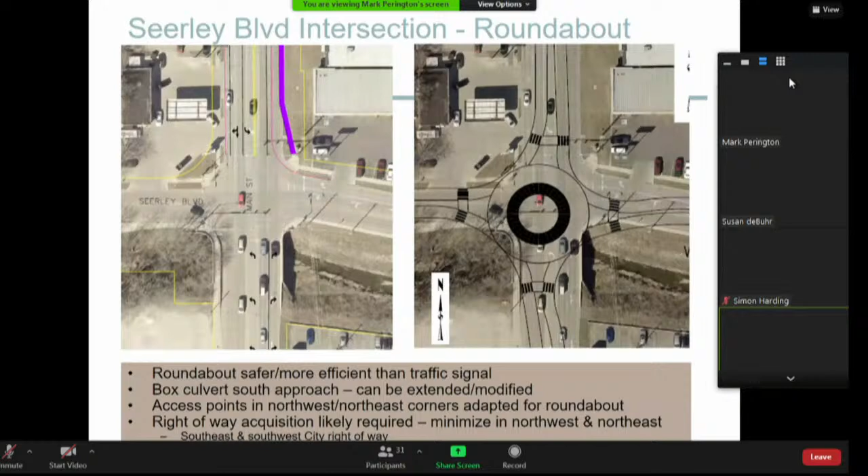We don't necessarily need a motion tonight. One thing that could come out of this is a council motion to move forward with one of the design proposals or options, which could be built in the coming months. We have some time available to revisit this before making that decision. So without needing a motion, would any council members object to having a follow-on committee of the whole meeting in the near future to discuss some of the public input from the design phase, have that presented, and answer some of these other questions? Would anyone object to that?

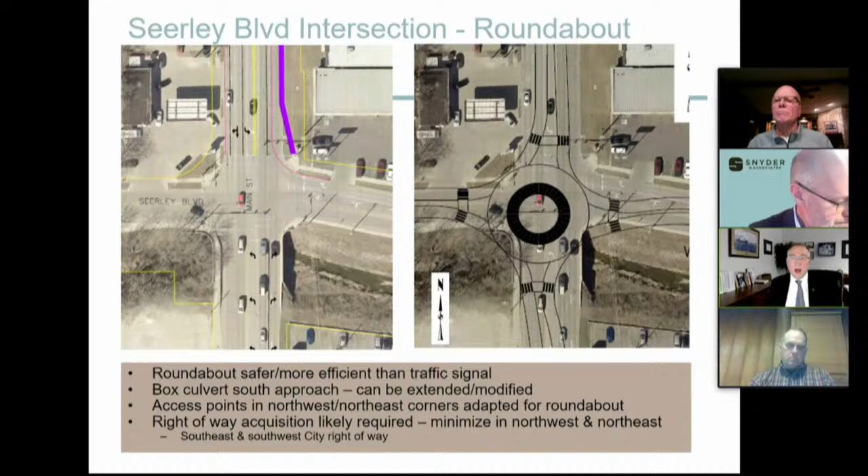Okay, thank you. So with a committee of the whole meeting to continue this discussion, I believe it would be warranted to have some additional time. We had 60 minutes for this one, and it might make sense to have 70, 80, or 90 minutes, and include a public comment section as well, since we weren't able to get to that tonight. That's great.

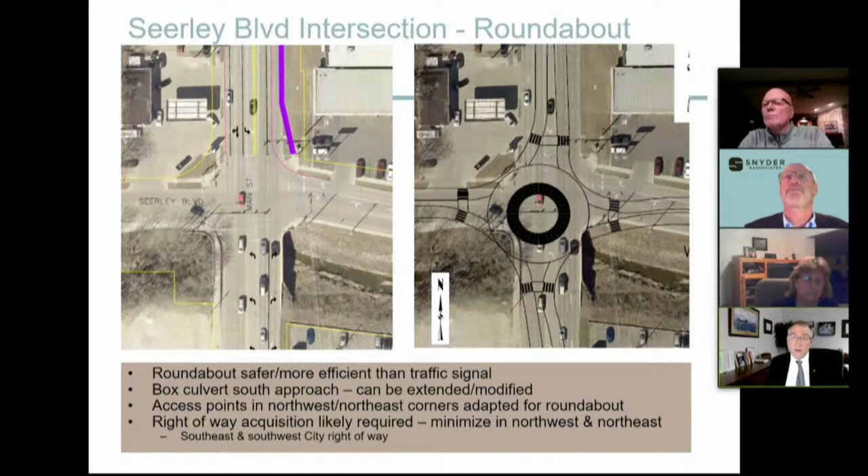Yes, please. It might be helpful to also add the traffic count numbers from the previous study, because they also had a count of bicycles seen on the corridor, and I think it's important for people to see that number, because it was excessively low. And I'd like to see the numbers you have up until 2017 extended out, since it's been 4 years, up to the current time, if possible. If there's an additional cost to that, let us know.

Mr. Mayor, yes, Councilmember Harding, and this will be the last comment. I'm not going to ask them a question—I don't want to take up anybody's time, but I've been writing down all my questions, and I probably have a lot of them. Is there a central location where I can send all my questions so everybody can see them, and maybe those could be incorporated into the next presentation? Should I email them to staff, Snyder, you? How about send this to Mr. Gaines, and he can get those out to... Or myself. That's fine. Okay, I'll CC. Okay, perfect, just wanted to know where to send them so we can all be on the same page. Thanks. Okay, and same for the rest of council.